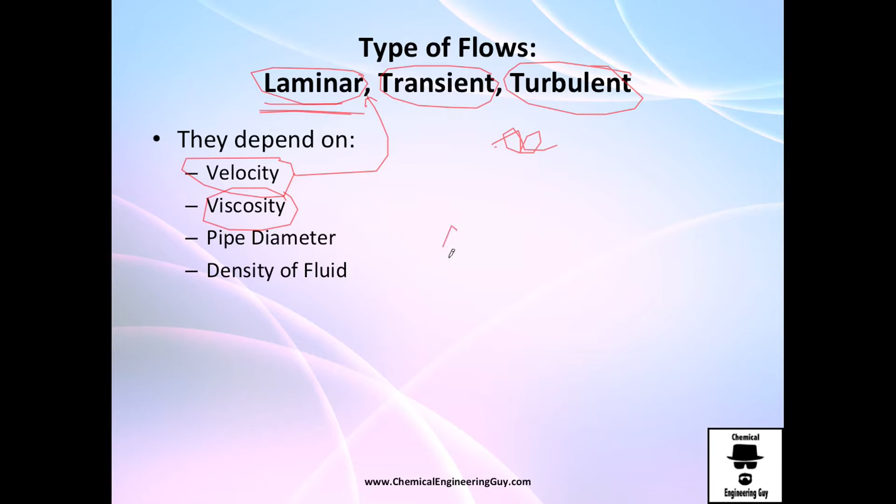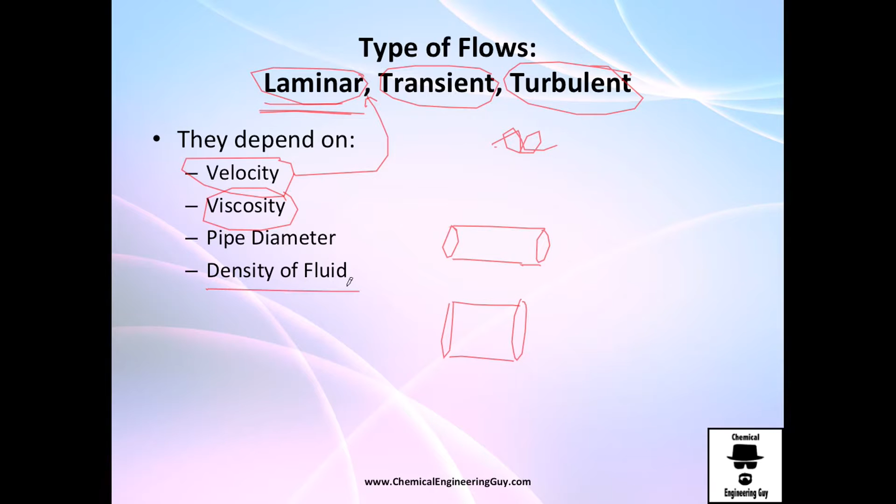Diameter, why? Because the diameter will affect velocity, and not only that, if you increase the diameter, you will expect more disorder. And the density of the fluid, this one is tricky, we're going to talk about it later. But first things first, velocity. Increasing velocity makes more disordered flow, that's true.

Hopefully you've seen this when you open the water of your sink. If you do it slowly, you will have a very nice jet. But if you open it, you will have like a super chaos and this is very fast and so on. And you will see, of course, this is ordered flow, this is disordered flow. So when you increase velocity, you favor turbulence. If slow, you may even model the flow as many layers.

So imagine here goes the flow, and you can see that actually you have many layers. The blue layer, the cyan layer, the green layer, the yellow layer, the light red layer, the dark blue layer, and so on. So you could actually model it as very fine layers moving as blocks.

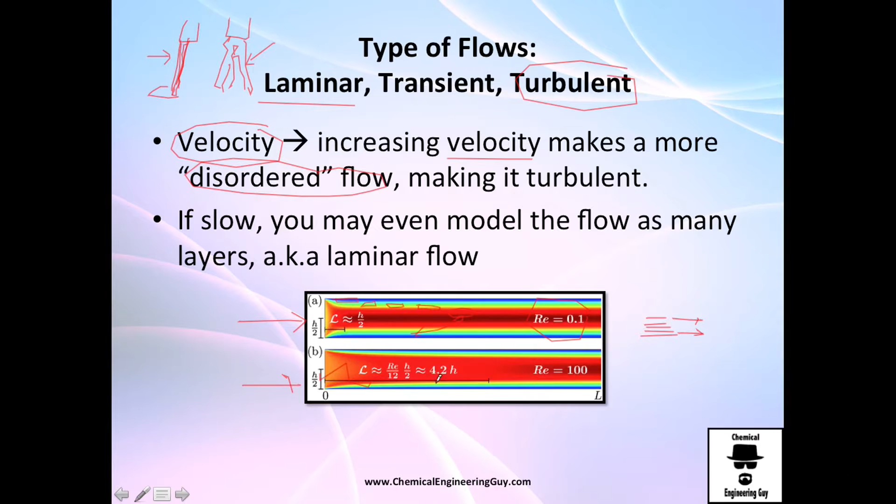Reynolds number actually here is very small, which means it's laminar. On the other side, guys, if we have an extremely high Reynolds number, which we don't have here, but let me show you, this will be a chaos. You could not model this as a layer.

Now viscosity: when you have more viscosity, you will in general need more shear stress to make the fluid flow. So if you have not that much flow, you will expect no turbulence. For example, this viscosity is very high, and this viscosity is very low. So which do you think is better to model?

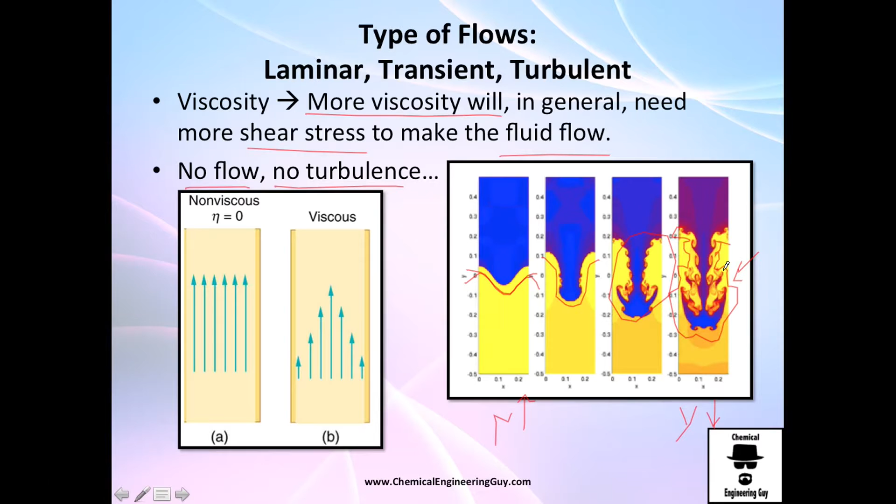Would you rather go and model each one of these random, very chaotic flow waves, or would you prefer to model this? Actually, you could model this with a cosine or sine function very easily. This one, well, a little bit maybe. This one is already very chaotic, and this is very chaotic. So hopefully you get the idea that as viscosity increases, we have less turbulence.

Now, pipe diameter. Recall, Reynolds number is rho times velocity times diameter divided by viscosity. So more density, more diameter, more Reynolds number. But larger diameters allow more space in the center, so you will expect more disorder. If you recall from your velocity profile, you will have very static flow here and very chaotic flow here.

So if you make it larger every time, you will expect something like this. This is high velocity, therefore there will be a lot of turbulence, and expect low turbulence right here. So the farther away you send the walls, the more chaotic the flow will be. So for example, imagine a very small diameter like this one. The walls are so close that you could model this with layers, and you could say it's laminar flow.

But be very sure, guys, that diameter affects velocity, so that's kind of tricky. The Reynolds number applies in general, but if you are using a cylindrical pipe, expect that if you increase the diameter, you will lower a lot the velocity. So what I told you is a factor of 2, and this will be a factor to the power of 2. So if I make it twice the diameter, I will change the velocity 4 times, because this changes.

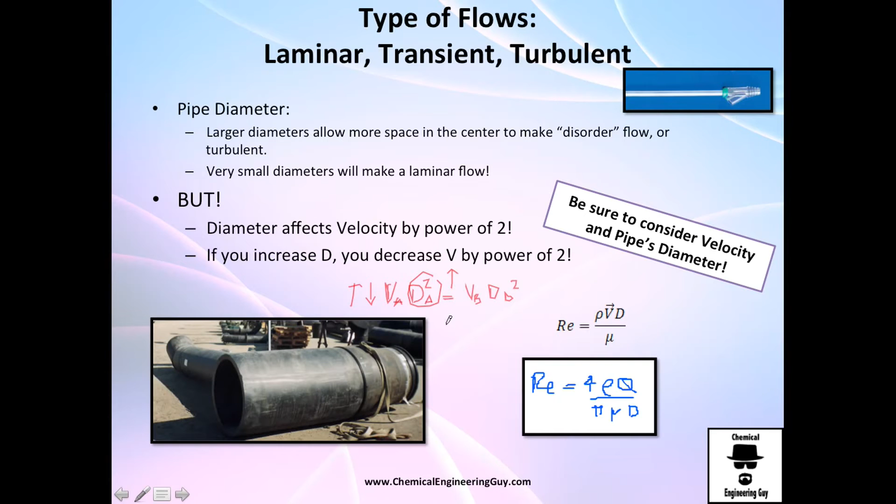You recall, let me show you here, the velocity of A times diameter of A squared equals velocity of B times diameter of B squared. So if you increase the diameter, you need to decrease the velocity. If you increase the velocity, you decrease the diameter. Good. Finally, density of fluid.

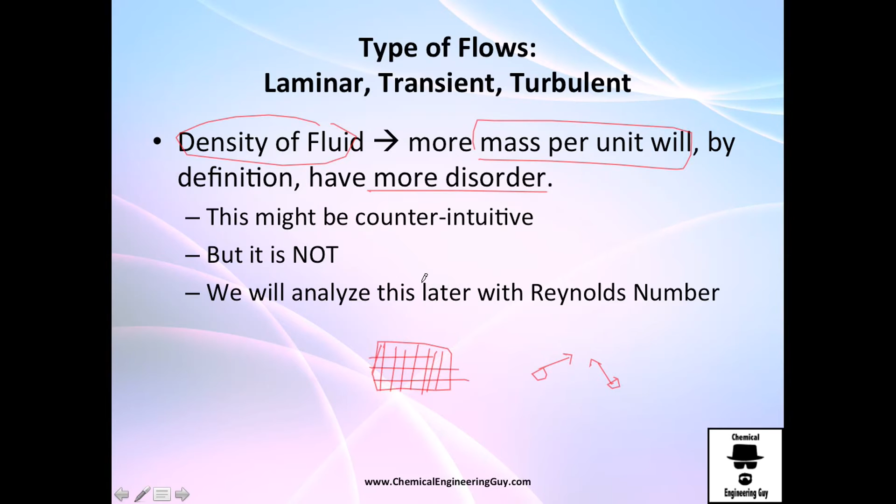More mass per unit volume will, by definition, have more disorder. This might be counterintuitive. You will say, no, more mass is more well packed. But actually, no, guys. Remember, we are talking about molecules, so more means more disorder. Anyway, let's analyze this in the Reynolds number in the next one. So, as I told you guys, these are the common examples, and these exact variables are used in the Reynolds number. So we can use the Reynolds number to know if laminar, transient, or turbulent flow is present.

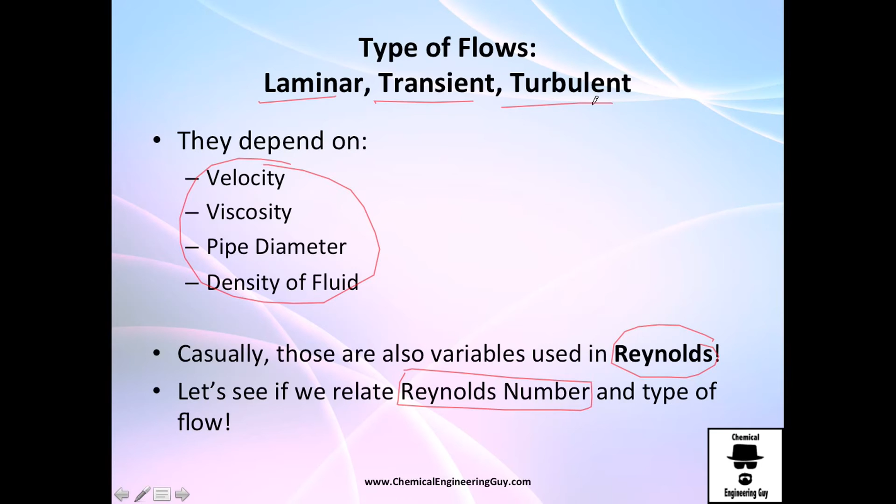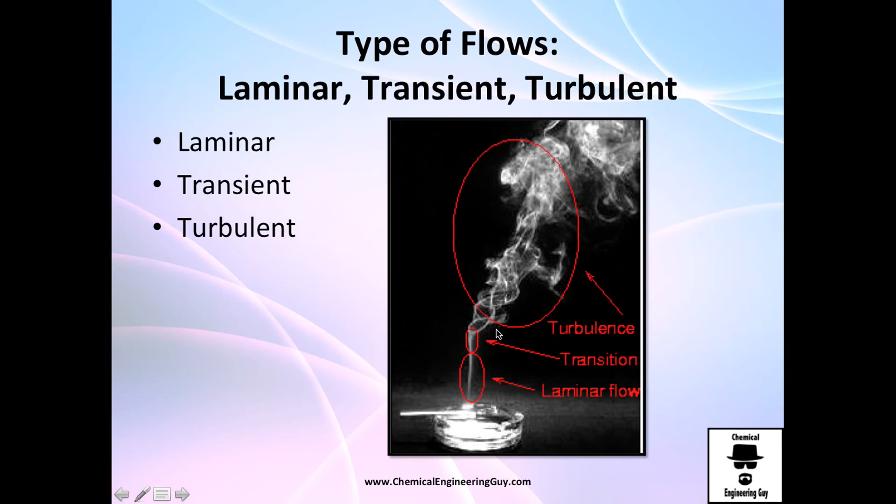So for example, this is the typical example you get in transport phenomena. You have the cigarette here, and it starts flowing very nice. Actually, I love this flow, it's so straightforward. And then it starts going a little bit chaotic, but not that chaotic. And finally, you get this super turbulent flow, which is relatively hard to model. So you want to avoid this transient flow, either laminar or turbulent flow. See you in the next video to understand the laminar flow more deeply.